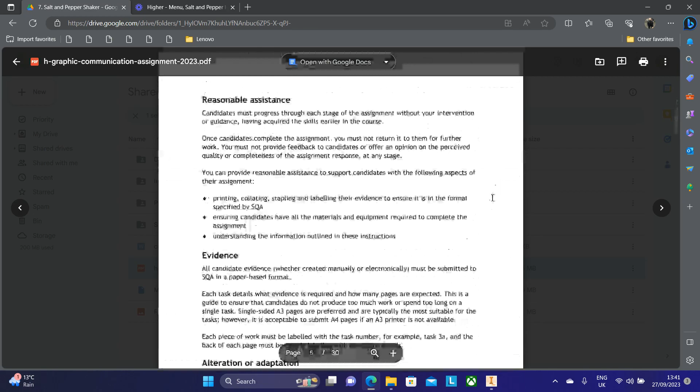In this video, we are going to look at assembling the model. Before we assemble, you need to make sure that you have made all of the parts.

Looking at the data sheets, we can see how the salt and pepper holder is supposed to be assembled. We can see that the hexagon of the salt and pepper bottom is on a corner, and then the top and the plates are all facing the front.

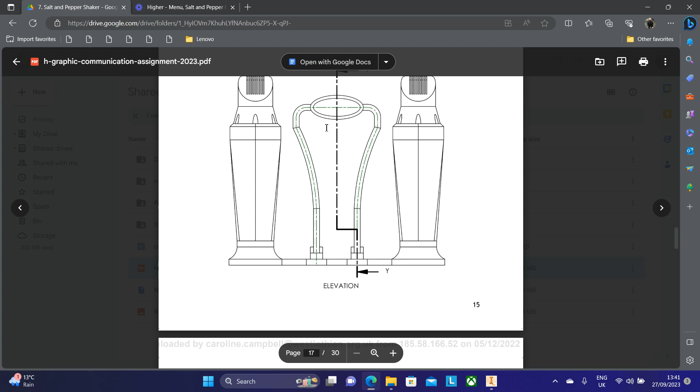The first thing we're going to do is go to File, New, make sure we're in metric, and then click a standard millimeter assembly.

We're then going to press Place, and we're going to place some parts of our menu salt and pepper holders.

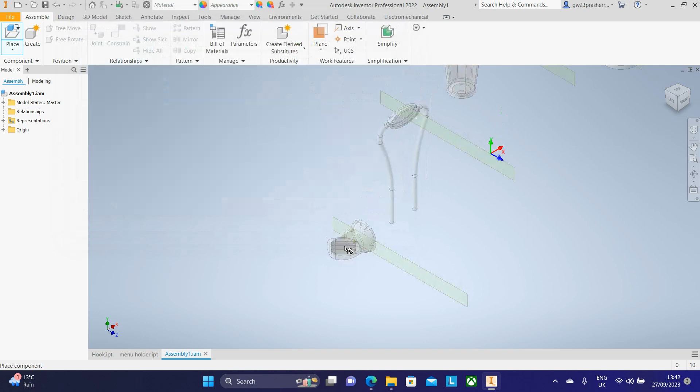I'm going to select all the parts and then press OK. I'm going to select and click two of each. So I've clicked twice, and then I'm going to press Escape.

Then I'm going to select one of the bases and press Delete. So I've got two of everything, but only one base.

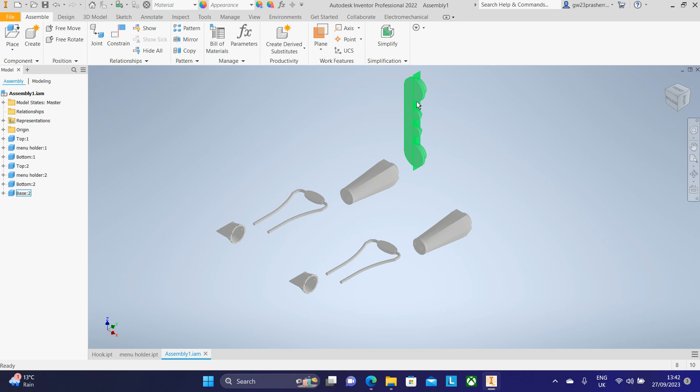As always, we're going to look at grounding something so that when we're modelling and constraining, it doesn't all move about. In this case, the base is what all of the parts fit into. So I'm going to right click the base and ground it.

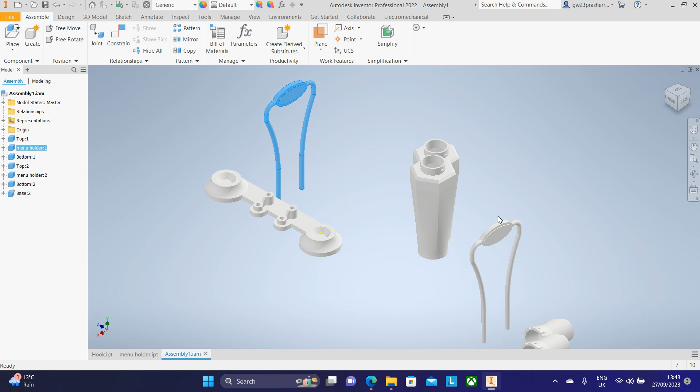The first thing I'm going to do is put in the two menu holders. So in order to do that, I'm just going to click Constrain.

I'm going to click the centre of one of the pins to the centre of one of the smaller circles and press Apply. I'm then going to do the centre of the other pin to the centre again of the other hole and press OK.

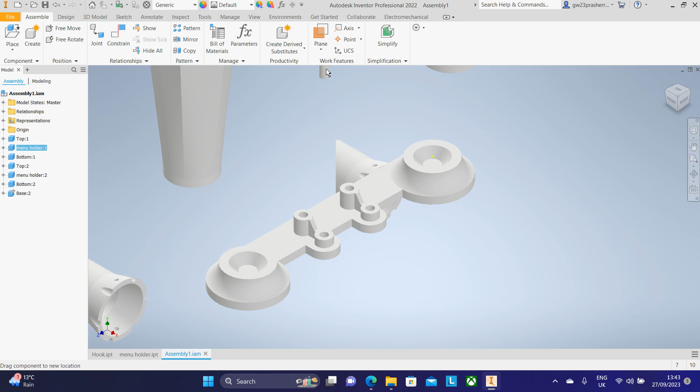I'm then going to drag it up just to make it easier for myself. What we want to do is constrain, and mate the bottom inside of that hole to the bottom of one of the pins, and again press OK. That is the first one attached.

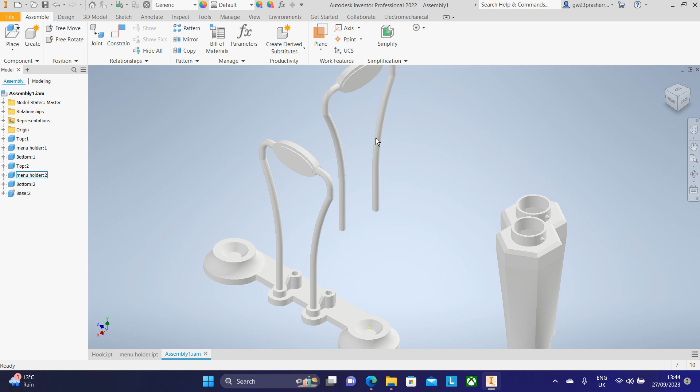Now we're going to repeat that with the back. So I'm going to constrain, do the centre of the circle to the centre of the circle and press OK.

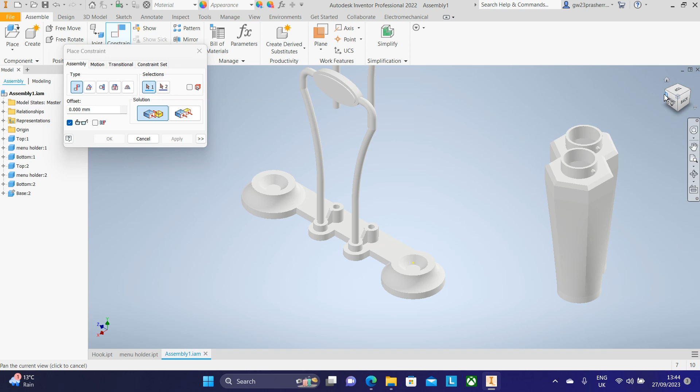Then I'm going to do constrain again and do the centre axis to the centre axis of the other circle. Lastly, I'm going to angle it so that I can see the bottom inside the hole, and I'm going to mate the inside of the hole to the bottom of the pin and press OK.

And that is the menu holder now secure. Next, we are going to look at constraining the salt and pepper bottoms.

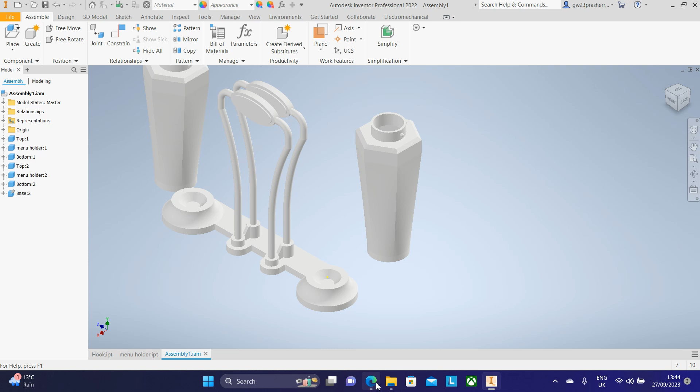As I said previously, it's important to make sure that the hexagon is on a point. So we're first of all going to constrain it so that we have done the centre of the circle to the centre of the bottom of the salt and pepper holder.

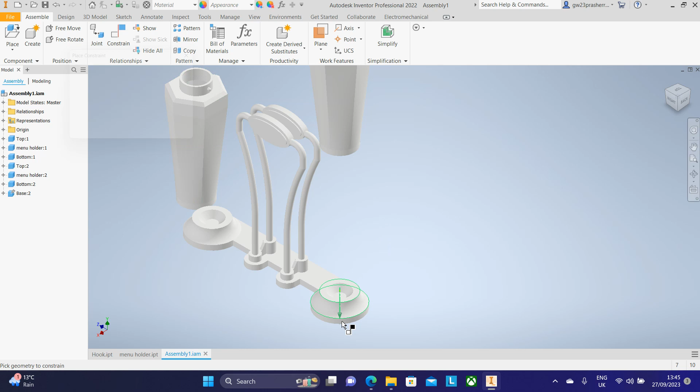Then I'm just going to drag that out. I am then going to mate the bottom to the very, very bottom of the salt and pepper bottom. And again press OK. This is where we want to make sure that it's sitting in the correct angle.

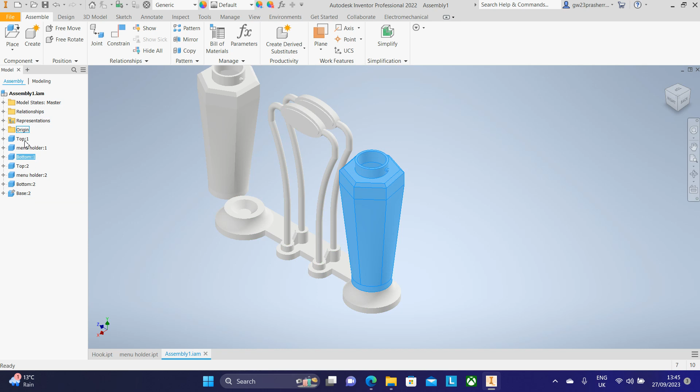So in order to do that, we're going to go to the modelling tree of the assembly and we're going to find the bottom that we're doing. In this case, it's bottom one.

I'm going to expand it and go into the origins folder and find the plane that's running down the middle. In this case, it's the YZ plane, and I'm going to turn on the visibility.

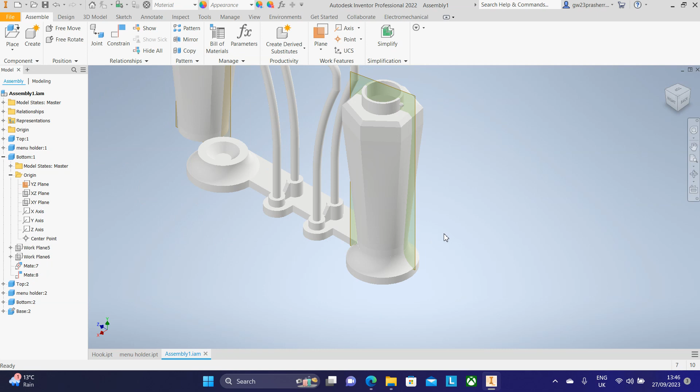Now we're going to use this plane to help us put it into its location. So I'm going to constrain and select the plane that I've just turned on, and I want to make sure that it's in a line with this part here of the base. And I'm just going to press OK.

You can see that that has now fully constrained it. And I'm going to do the exact same with the other bottom.

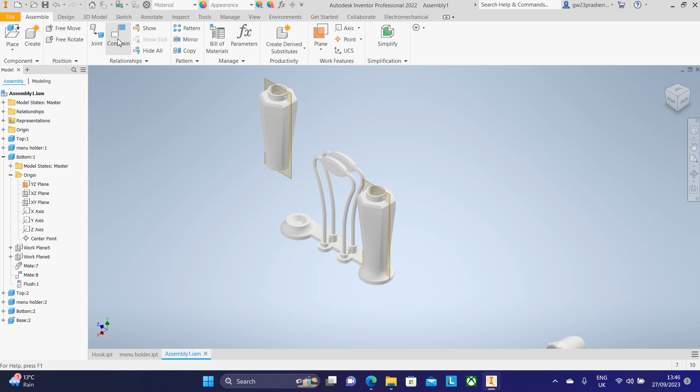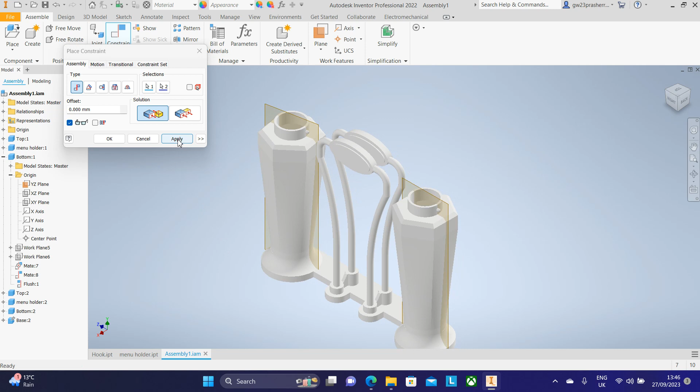So I'm going to go constrain, centre axis to centre axis, then mate the inside of the hole to the bottom of the salt and pepper shaker. There we go. And then I'm going to change it to a line, and go from the plane to the edge of the bottom and press OK.

Once they're fully constrained, you can go back to your modelling tree and right click the YZ plane and turn off the visibility, and it will still be fully constrained, it's just you won't see the planes.

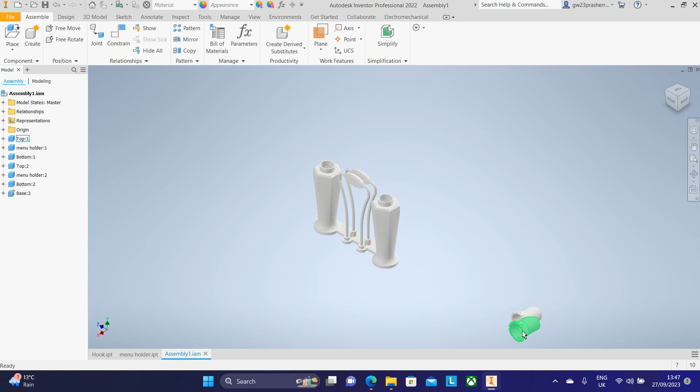Next, we're going to look at doing the salt and pepper tops. So I'm just going to hold down G on my keyboard and turn them just so that they're roughly in the right angle.

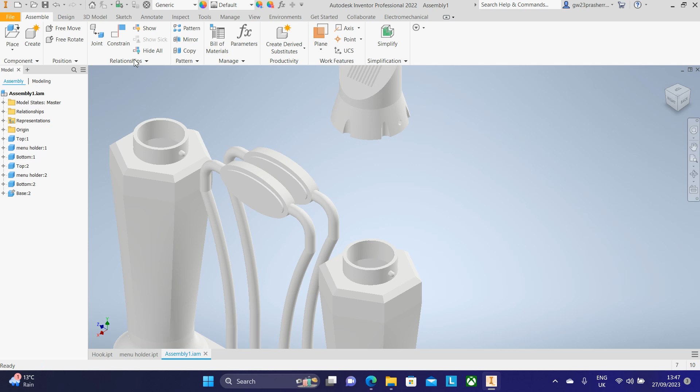Now I'm going to constrain by doing centre axis of the salt and pepper bottom to the centre axis of the salt and pepper top, like so. And I can now do the centre axis of one of the small circles for the pin to the centre axis of the pin on the salt and pepper bottom, and that will now be it fully constrained.

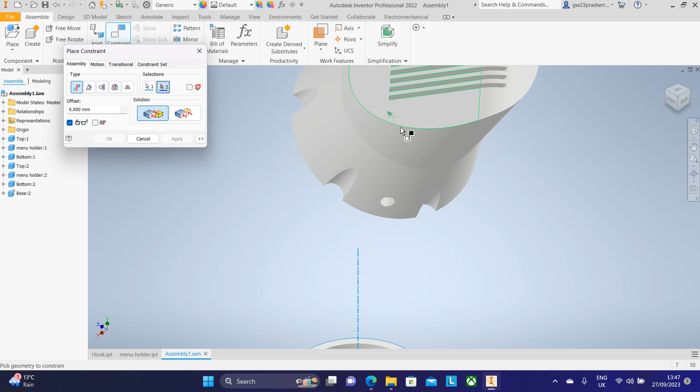We're going to do the same with the other top. We're going to go centre axis to centre axis and then press OK, drag it up and then constrain the centre of the pin to the centre of the pin, and again press OK.

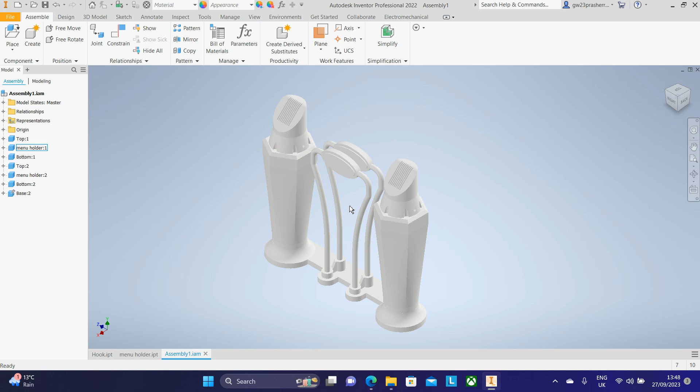Once that's done, no parts should be able to move, which means that it is fully constrained. So we can look at saving your assembly ready to put onto an orthographic sheet.